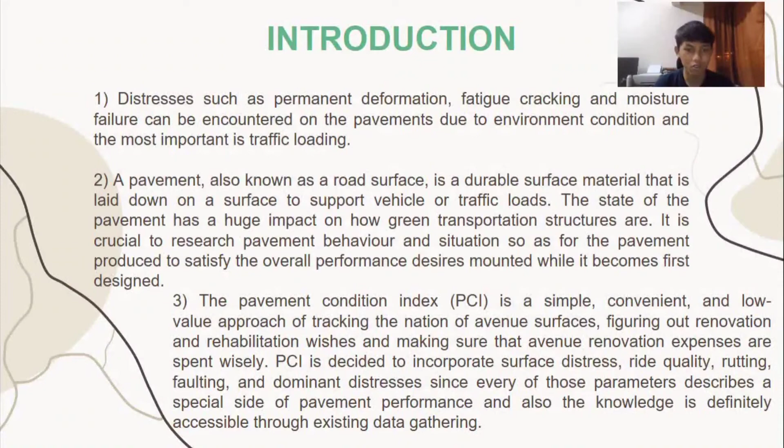The Pavement Condition Index, or PCI, is a simple, convenient and low-cost approach for tracking the condition of road surfaces, figuring out maintenance and rehabilitation needs, and ensuring road maintenance expenses are spent wisely. PCI incorporates surface distress, ride quality, rutting, faulting, and dominant distresses, since each of these parameters describes a special aspect of pavement performance. The knowledge is also easily accessible through existing data gathering.

We move to literature review. This project will examine and evaluate flexible pavement failures in order to devise maintenance. The determination of a pavement's condition is vital in figuring out the type and degree of repair the road must get, with the intention of providing the proper level of service to vehicle traffic.

To pick the best treatment approach, it is important to assess and discover the reason for failed pavement. Based on earlier studies and literature review, systematic guidelines for evaluating damaged pavement are given in order to provide significant statistics for maintenance operations.

For example, in Sudan, comprehensive field work was performed on the existing pavement condition of a road. Major cracking and rutting failure was discovered in the majority of the damaged pavement conditions. Fatigue failure of the pavement structure as a result of the movement of heavily loaded trucks and trailers could have caused these incidents.

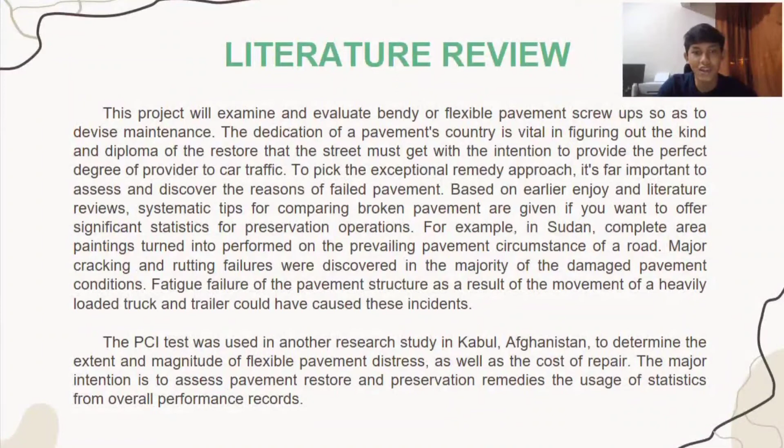The PCI test was used in another research study in Kabul, Afghanistan, to determine the extent and magnitude of flexible pavement distress, as well as the cost of repair. The main intention is to assess pavement repair and maintenance treatments, using statistics from overall performance records.

There are three objectives for this project. First, to assess the state of the road in Jalan Seramik Chepor 11/2, Chepor, Perak that has been chosen. Second, to detect the type of road defect that occurs over a distance of 1 kilometer. Third, to determine repair procedures and make recommendations to increase the pavement's durability.

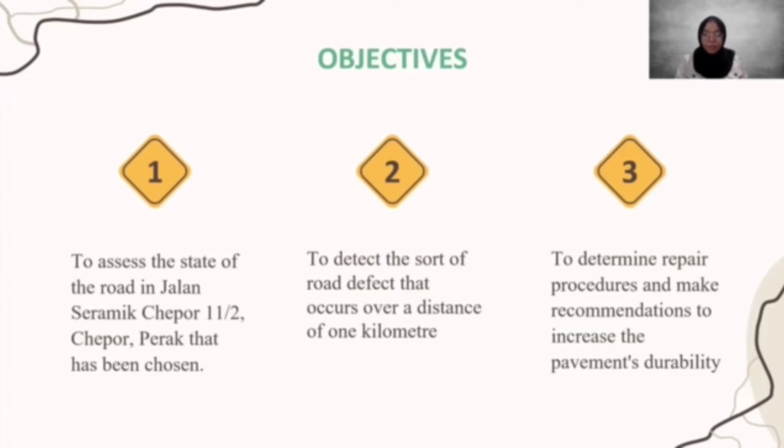For methodology, there are four steps that we use. First, we need to choose the location of the study area. Next, we need to choose the road with the most failure. After that, we need to classify the road failure. Last but not least, we need to calculate the Pavement Condition Index.

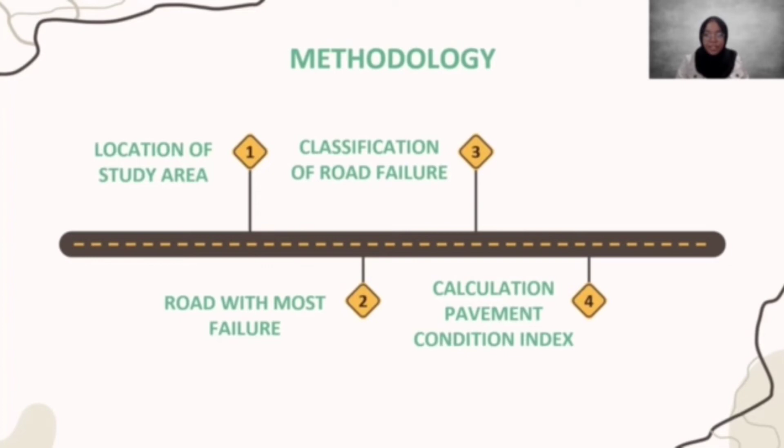In order to calculate the PCI for a unit, first, calculate the deduct value. Second, determine the maximum number of deductions that can be made. After that, determine the sample unit's maximum corrected deduct value. Last but not least, calculate the Pavement Condition Index.

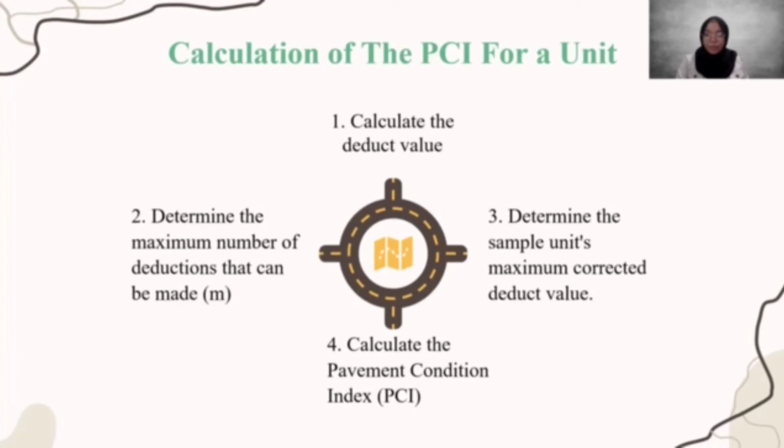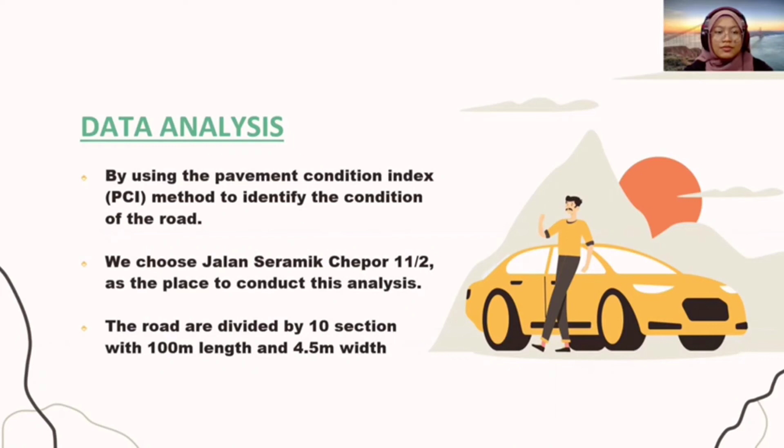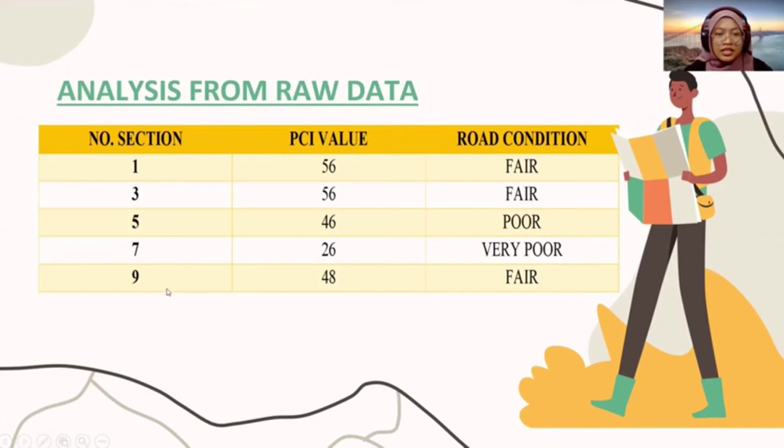This table shows the analysis from the raw data for sections 1, 3, 5, 7, and 9, and their PCI value and road condition.

The conclusion we can get from the raw data is that the average PCI value is 46.4. For this PCI value, we can observe that the road pavement is in poor condition. Based on the rating PCI value of 46.4, this road has a level of service LOSD, and this pavement needs major rehabilitation.

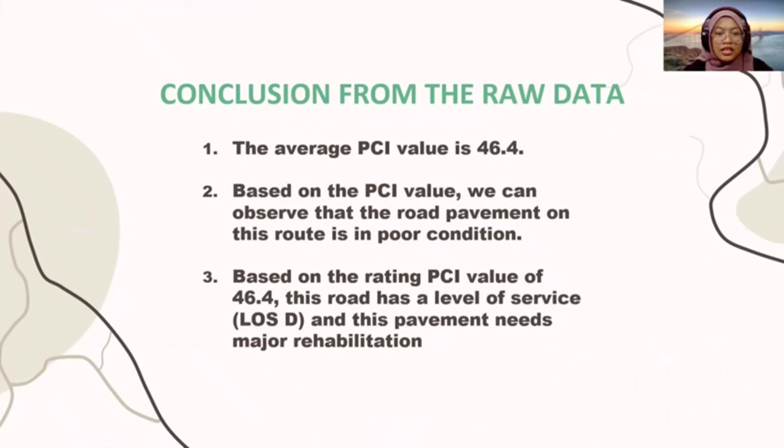Based on our project, we found our PCI, the Pavement Condition Index, averages 46.4, which is really bad. So I think we need routine major rehabilitation or deferred action only to increase the PCI.

In the worst case, there can be severe distress below the pavement with no visual sign of distress. I think this is really dangerous, so other testing and inspection methods should be used to quantify the specific pavement condition.

The factors that result in this fracture are pressure from loads, temperature change in the road layer, and excess moisture content.

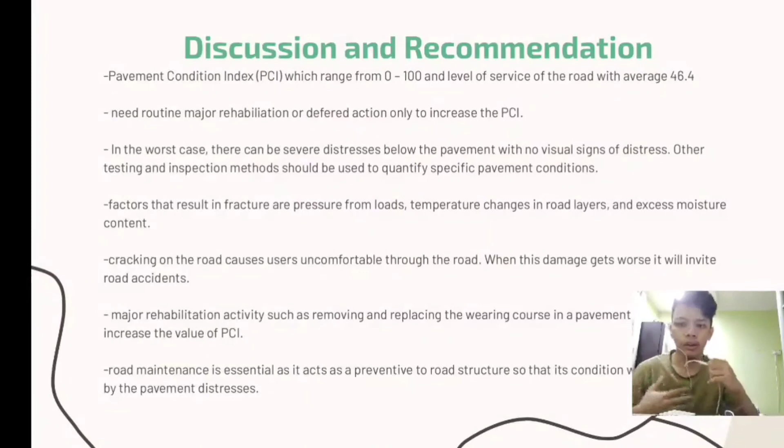Cracking on the road causes discomfort for users of this road. When this damage gets worse, it will invite road incidents. So I think major rehabilitation activity such as removing and replacing the wearing course in the pavement should be done to increase the value of PCI.

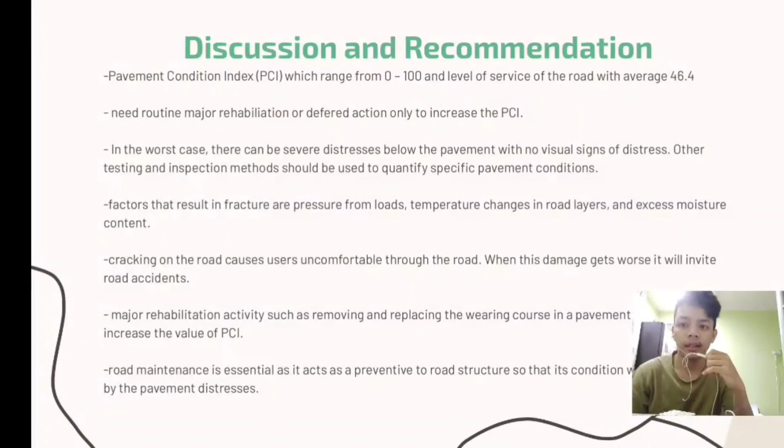Road maintenance is also essential as it acts as a preventive measure to the road structure so that the condition will not be affected by pavement distress.

For the conclusion of this project, the purpose is to determine the distress of the pavement and the pavement condition index. Several types of distress such as alligator cracking, bumps, longitudinal cracking, block cracking, and depression were found in this road.

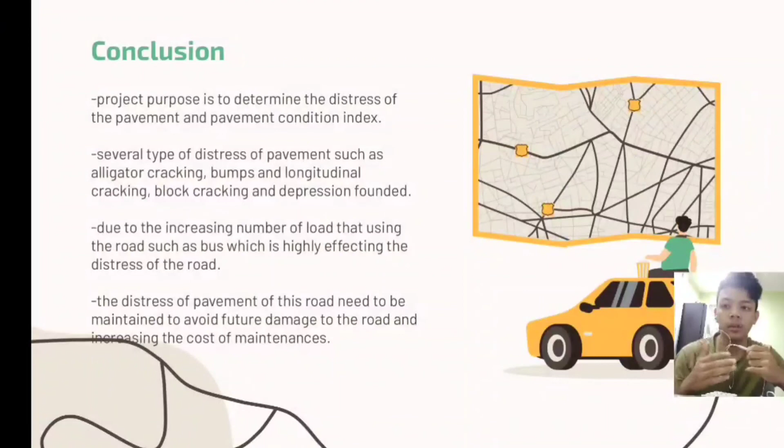This is due to the increasing number of loads using the road, such as buses and lorries, which highly affects the distress of the road. So the distress of this pavement needs to be maintained to avoid future damage to the road and increasing the cost of maintenance. Thank you.